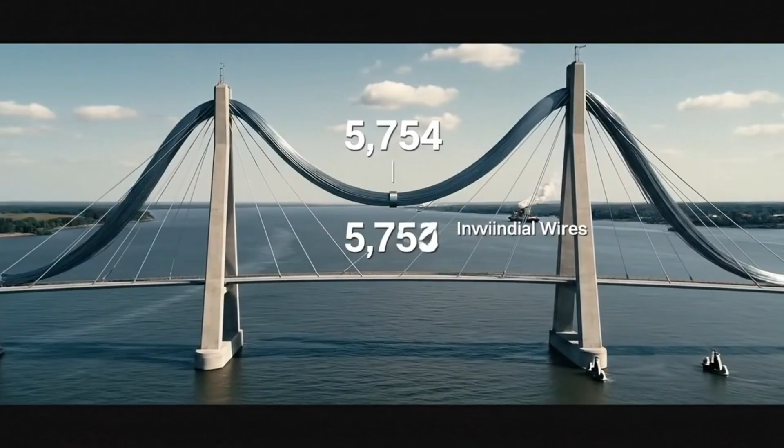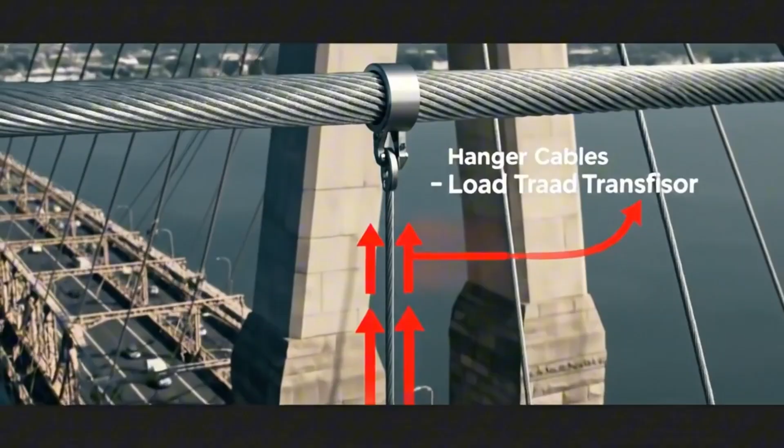In this documentary, we'll witness 5 revolutions across 5,000 years. From the weight of stone to the elegance of steel, from brute labor to computer simulation. Every bridge built over an abyss represents the moment a civilization erased the word impossible from its vocabulary. The vertical hanger cables transfer the massive load of the deck below, distributing the weight along the main cable. Get ready to discover the engineering breakthroughs that finally conquered the impossible.

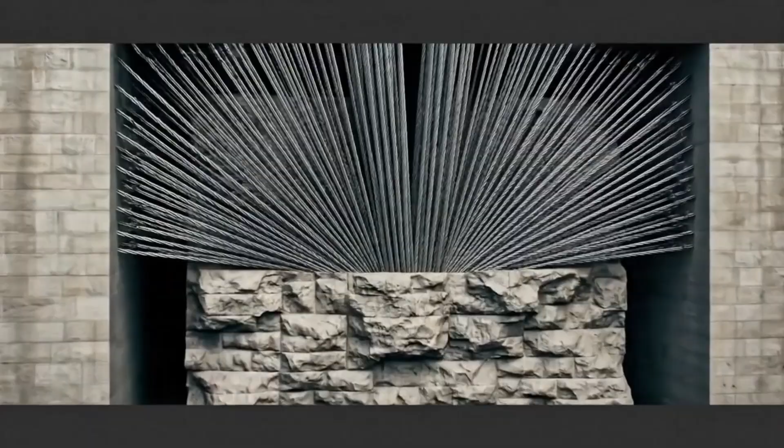What actually stops a 100,000-ton bridge from plunging into the void below? Yet the answer isn't concrete. It isn't steel. It isn't cables. The answer is the invisible laws of physics. We'll unravel the secrets of bridge engineering by decoding the hidden mechanics of arches, beams, and tensioned steel.

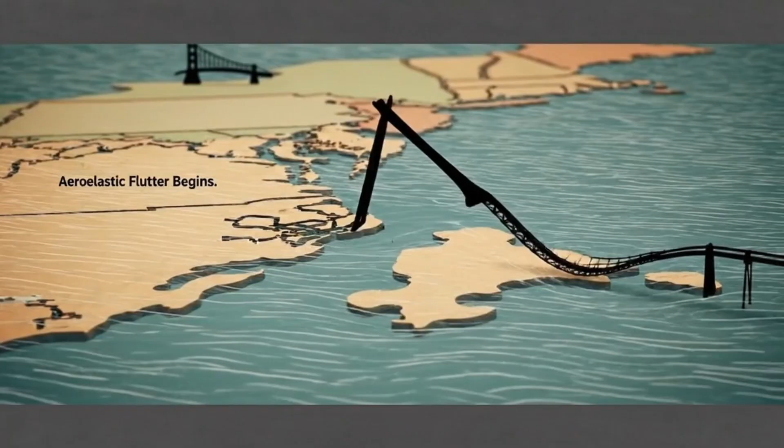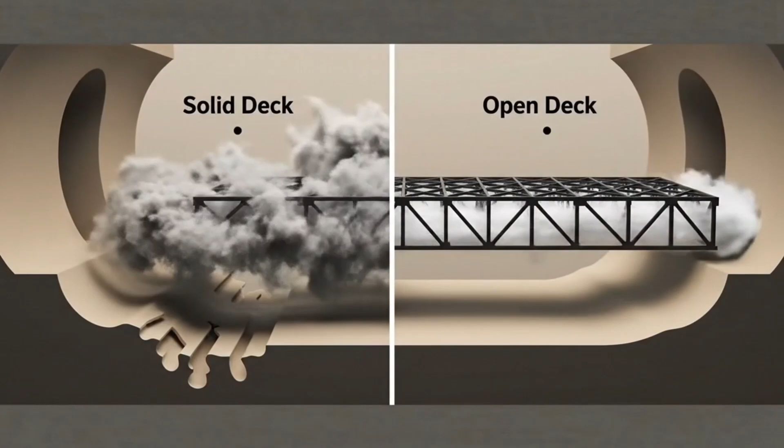Ancient civilizations faced a deadly choice. Find a way across or remain forever divided by the world's great separations. Rivers split empires in two. Valleys shut down trade routes. Straits severed continents from one another. This documentary is the story of how primitive builders, through radical innovation, conquered impossible heights and became master engineers.

A journey that began with a single tree trunk now continues with steel wings soaring 300 meters above the ground. Follow the 5,000-year timeline of the structures that reshaped our planet and wove our world together like a net. Every arch is an equation, every cable is a prophecy, and every bridge is the greatest gift physics ever gave to mankind.

5,000 years ago, the first bridge was a fallen tree trunk. An oak or a plane tree toppled into a river by a storm. An accident. But from that accident, an idea was born. If nature could lay a tree across a river, we could do it deliberately. Humanity had made its first engineering decision.

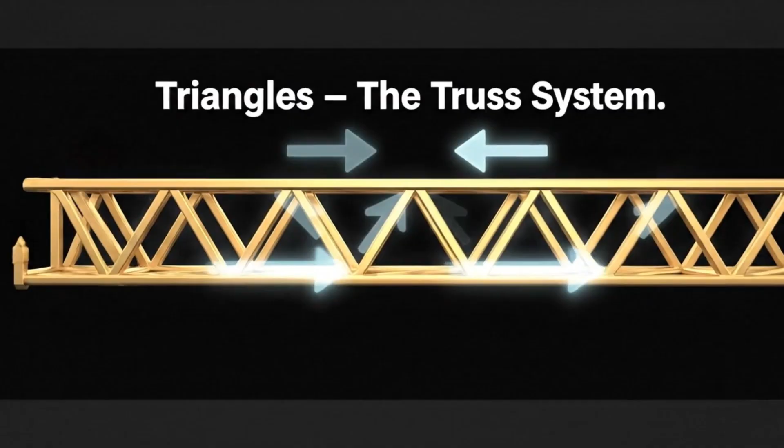The earliest bridges were built from raw materials with raw force. Stone slabs, logs laid side by side, ropes stretched between two rocks. These weren't calculations, they were instinct. The concept of mathematical load distribution hadn't been invented yet. Ancient bridges knew only one strategy for fighting gravity: raw mass.

Thicker stone, more supports, heavier foundations. If the bridge collapses, build a bigger one. This strategy worked, but it had a limit. Stone is heavy and cannot span large gaps. Any stone beam longer than 10 meters collapses under its own weight.

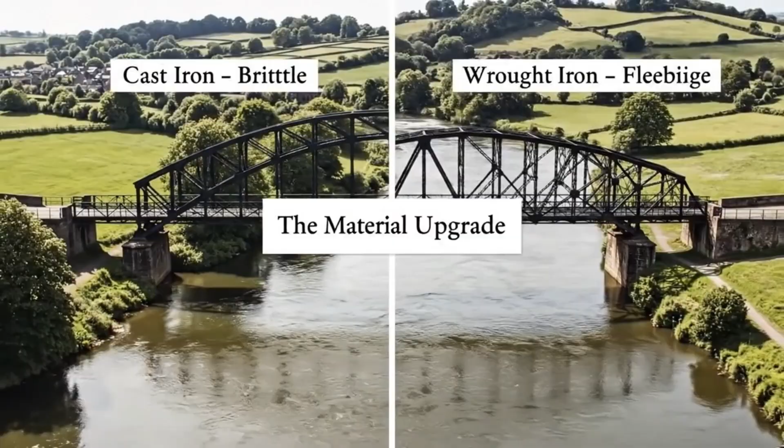The revolution came from Rome. The Romans perfected the arch. The arch is one of the most elegant inventions in the history of engineering. Its principle is profoundly simple, but its effect is revolutionary. It converts a vertical load into lateral compression by pressing the stones against one another.

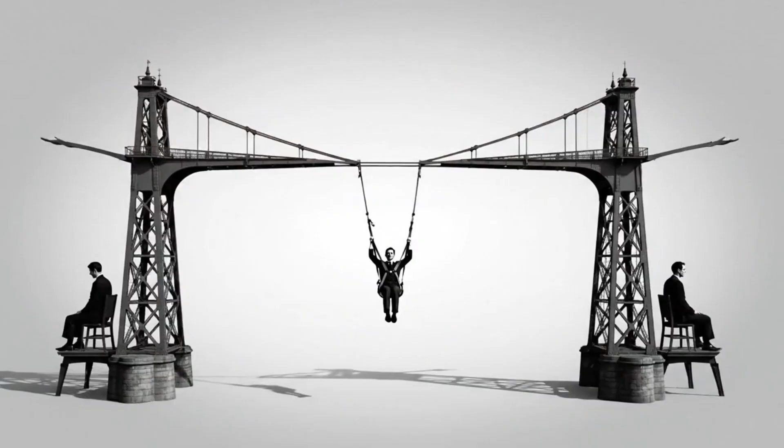Every voussoir leans on the stones beside it. Pull the keystone at the top and the whole structure collapses, but leave it in place and every stone locks the others. The force of compression holds the structure upright. When the Romans applied this principle to river bridges, waterways that had once seemed impassable became crossable.

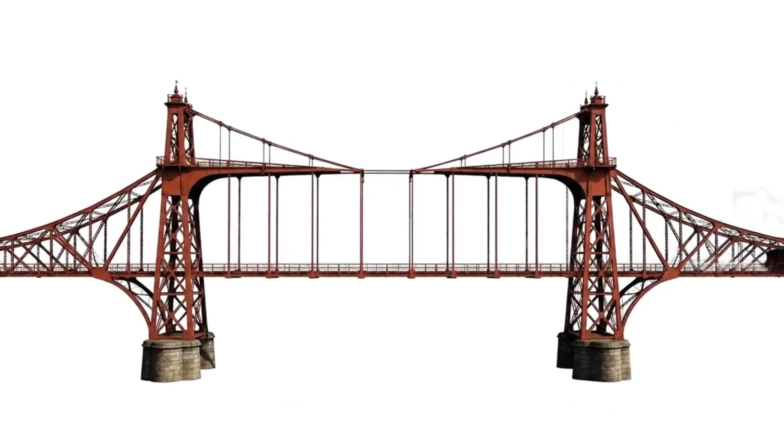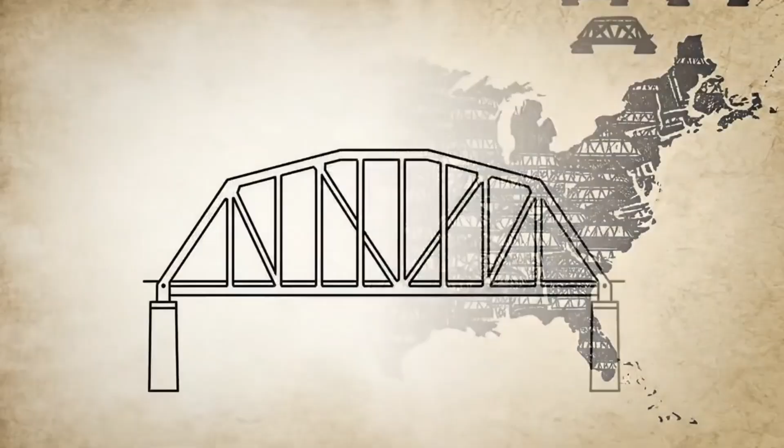The Ponte Fabricio was built in 62 BC and still stands in Rome today. A bridge that has served pedestrian traffic for over 2,000 years. The Romans didn't just build bridges. They laid the circulatory system of an empire. Every river crossing was a trade route. Every trade route was a military corridor. Every corridor was the empire's expansion. Bridges were Rome's instrument of conquest.

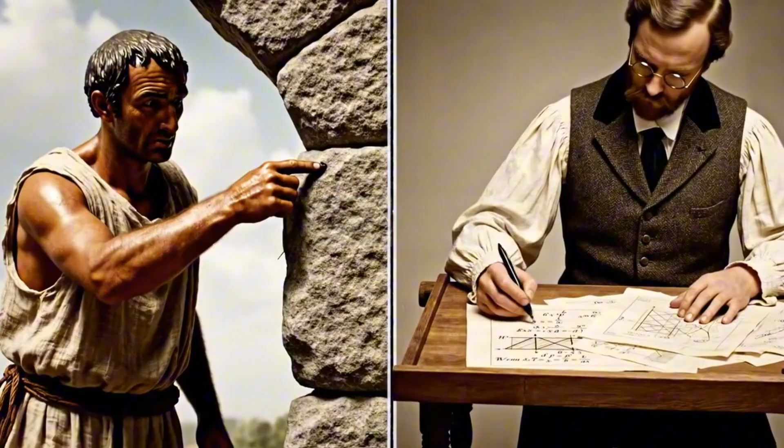The transition from raw natural materials to early stone masonry represents the first great leap in the history of engineering. Temporary crossings became the permanent monuments of an empire. Stone was no longer just weight, it was calculated power. The arch was no longer just a shape. It was the first formula ever written against gravity.

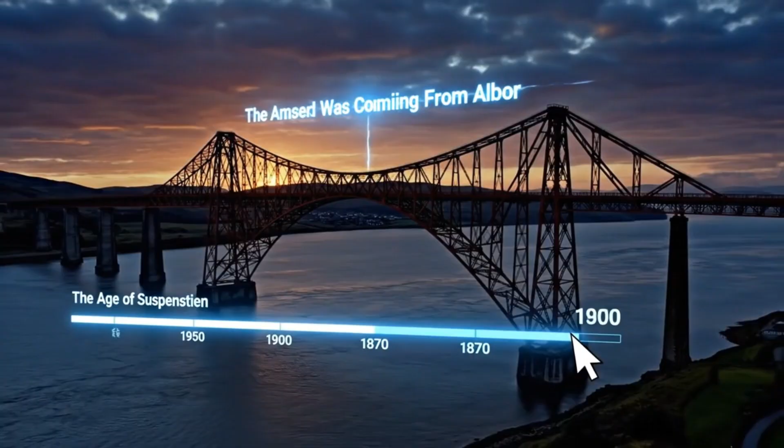The power of the triangle and the railway age, 1700 to 1900. In the late 18th century, the world began to change. The Industrial Revolution created an unprecedented demand for connectivity between factories, mines, and cities. But the real revolution came with the railroad. Locomotives weren't just carrying people and goods.

The loads they carried had long since exceeded the capacity of traditional bridges. A Roman arch could support a legion of soldiers, but it couldn't handle the dynamic load, vibration, and repeated impact of a 100-ton steam locomotive.

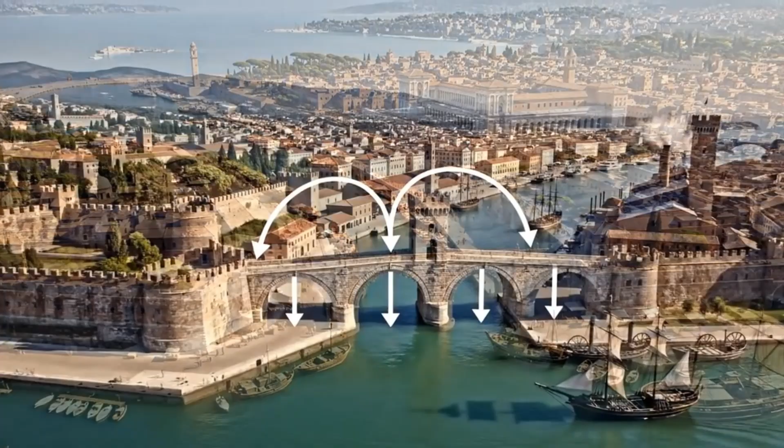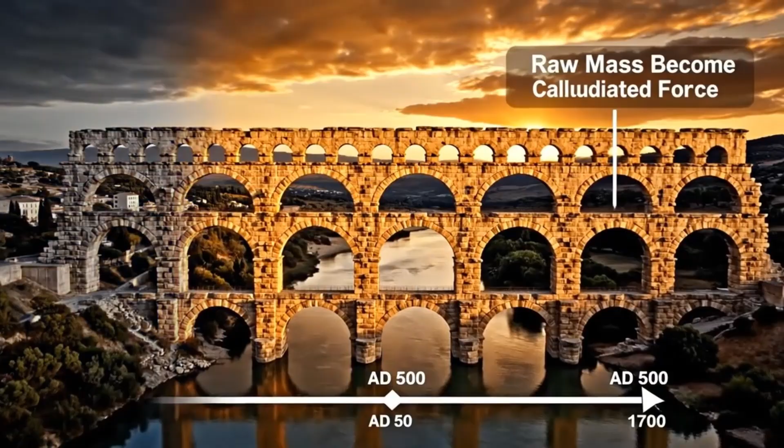Engineering discovered a new structural unit: the triangle. The triangle is geometry's most rigid shape. Push a square and it becomes a parallelogram and collapses. But push a triangle and it holds its shape. This simple geometric truth transformed bridge engineering at its roots. The truss bridge was born.

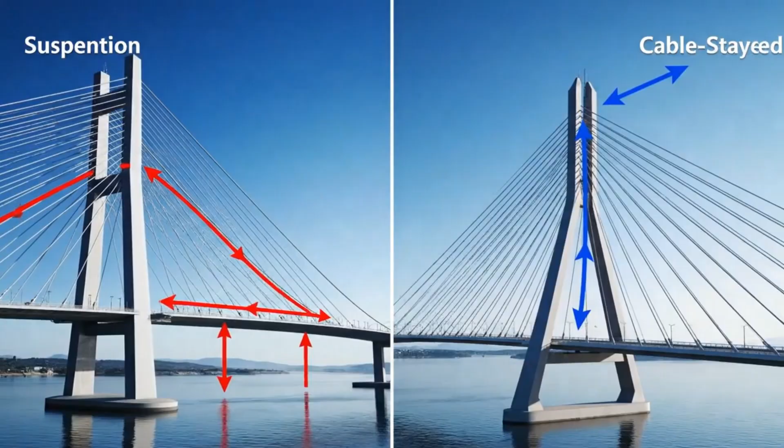In truss systems, metal rods are joined in triangular arrangements. Each triangle distributes forces to neighboring triangles. The result: you can carry far heavier loads with far lighter materials. Cast iron, and later steel, became the material of this triangular revolution. In England, America, and every corner of Europe, railway bridges rose.

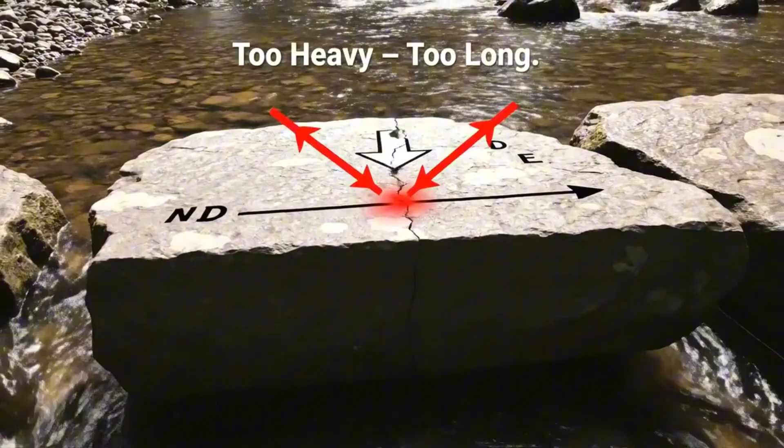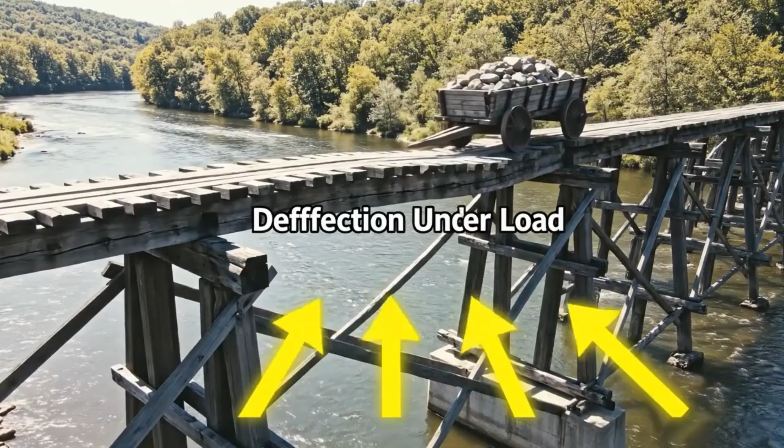The Forth Bridge in Scotland was constructed between 1882 and 1890. Its span, 521 meters. At the time of completion, it was the longest bridge in the world. 54,000 tons of steel were used. The Forth was the triumph of the truss system. But it also symbolized a transformation.

Bridge engineering was no longer an intuitive craft. It was a calculated science. Engineers were no longer saying this looks strong enough. They were calculating material strength, mapping load distribution, and determining safety factors.

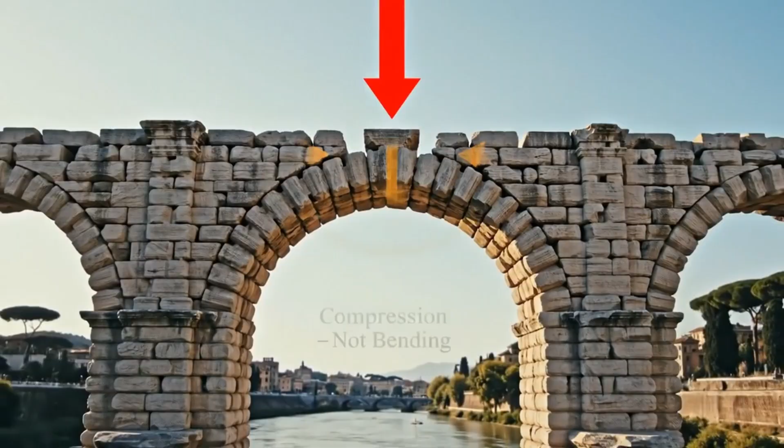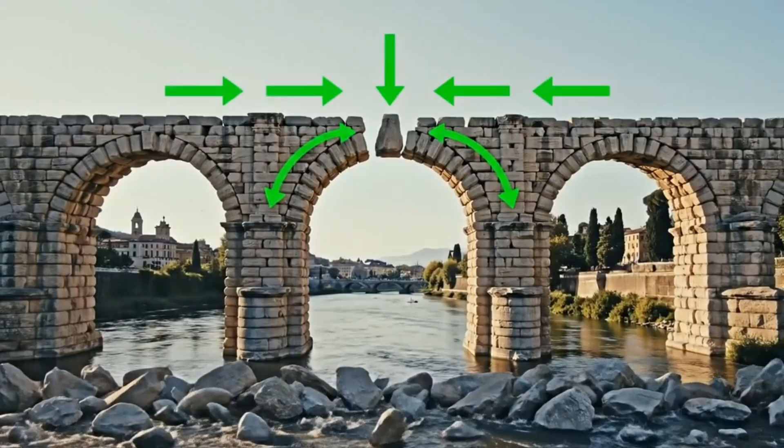This transition was critical. The shift from intuitive approach to precise physical principles laid the groundwork for the age of iron and steel. The triangle gave engineers a language, and with that language they could fight gravity, not with raw mass, but with geometry. Less material, more resilience, longer spans. The triumph of the triangle opened the door to the revolutions of the 20th century.

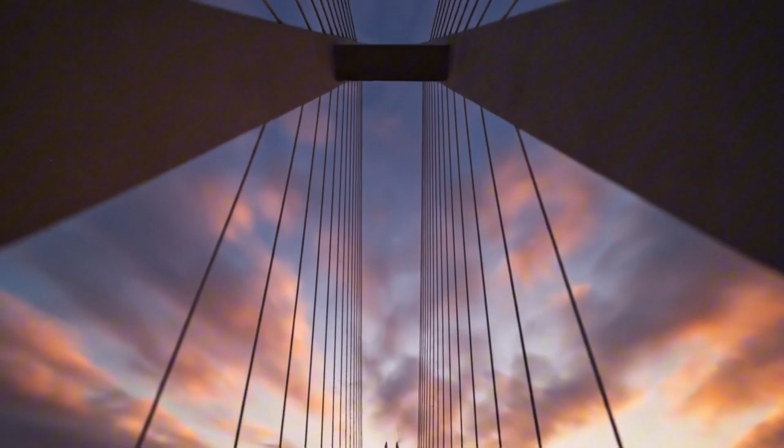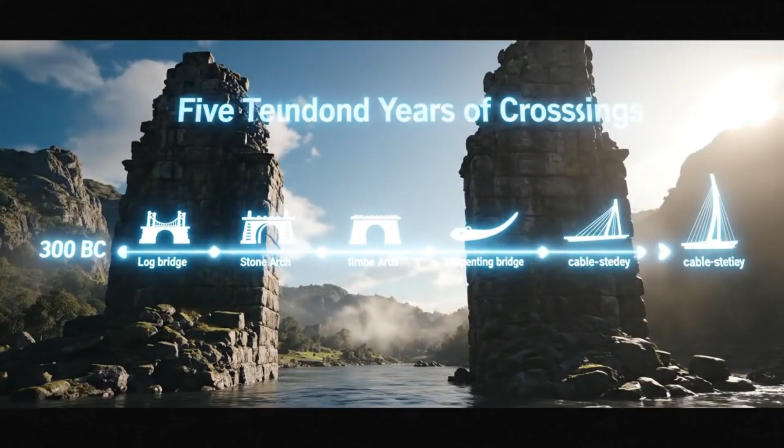Suspension bridges and the steel cable revolution, 1870 to 1950. In the late 19th century, engineers came face to face with a limit. Truss bridges were powerful, but beyond a certain point they became inefficient under their own weight. In spans exceeding 500 meters, the steel truss structure grew so heavy that most of what it was carrying was itself. A different approach was needed.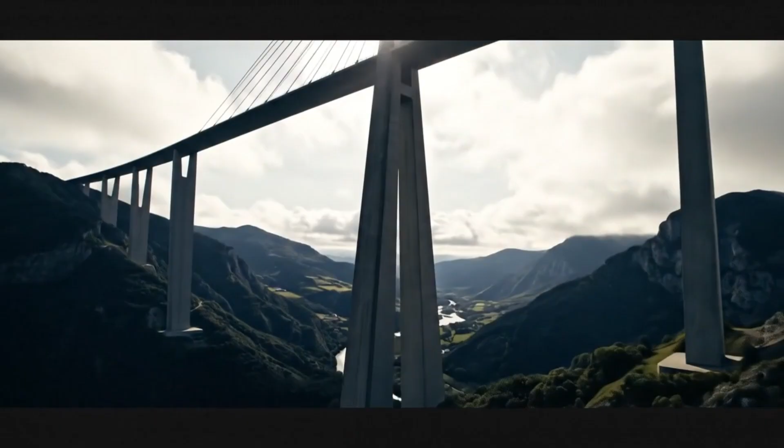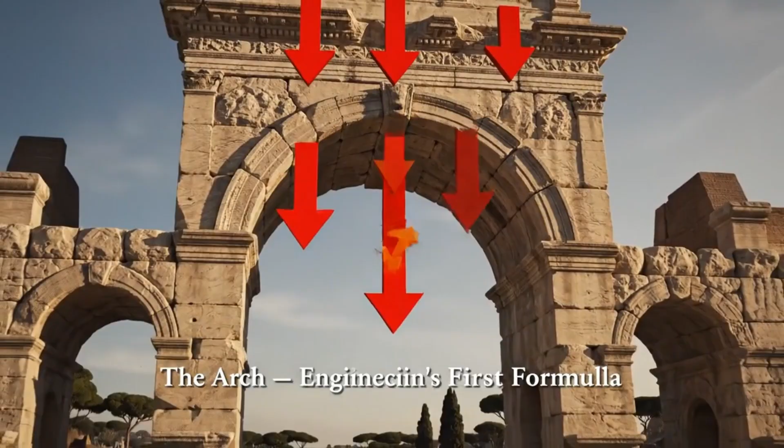The answer came from above: the suspension bridge. The principle was ancient, but the application was revolutionary. Instead of supporting the deck from below, suspend it from above. Main cables anchored to massive towers trace a parabolic curve. Vertical hangers dropping from those cables hold the deck in the air. The deck no longer has to carry its own load. The cables carry it. The cables transfer it to the towers. The towers deliver it to the foundations.

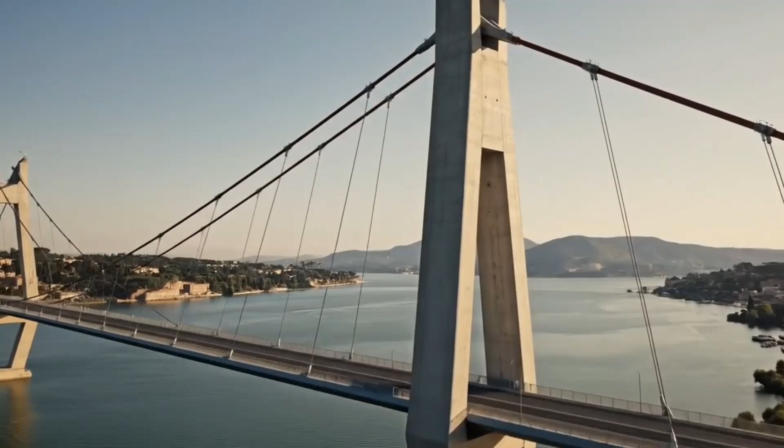The Brooklyn Bridge was the manifesto of this revolution. Completed in 1883. Span: 486 meters. At the time of completion, it was the longest suspension bridge in the world. Its engineer, John Augustus Roebling, perfected steel cable technology. Each main cable was woven from 5,434 individual steel wires. Each wire was pulled, laid, and compressed separately. This process took 14 months.

Brooklyn was not just a bridge. It was proof of suspension bridge physics. When rigid beams gave way to flexible cables, spans could multiply. But every revolution has a cost. In 1940, the Tacoma Narrows Bridge disaster struck. This suspension bridge in Washington State was vulnerable to wind because of its lightened deck.

Winds of 65 kilometers per hour drove the bridge into resonance. The deck began to undulate. The wave amplitude grew. The structure entered aeroelastic flutter and tore itself apart. The disaster was captured on film and became the most famous failure footage in engineering history.

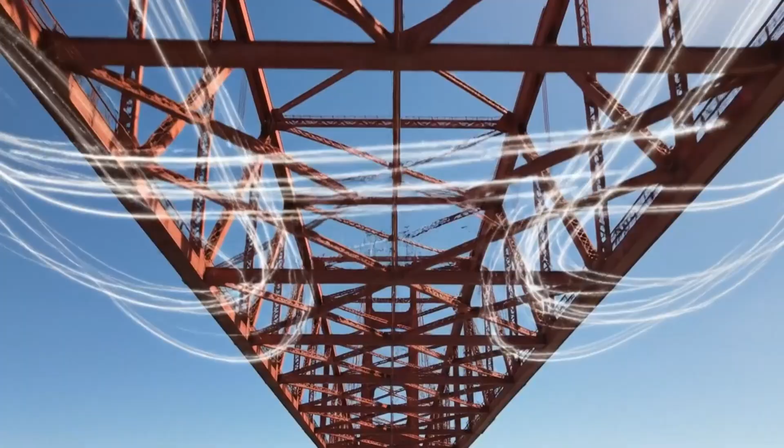Tacoma delivered a lesson. A bridge must resist not only weight, but wind. Aerodynamics became an inseparable part of bridge design. Wind tunnel testing became standard. Deck cross-sections were reshaped into aerodynamic profiles. The legacy of catastrophe was safety.

When the Golden Gate Bridge was completed in 1937, its span of 1,280 meters made it the longest suspension bridge in the world. Its Art Deco towers, international orange color, and silhouette rising through the San Francisco fog made it not just an engineering achievement but a cultural icon. The Golden Gate proved both the power and the beauty of the suspension bridge.

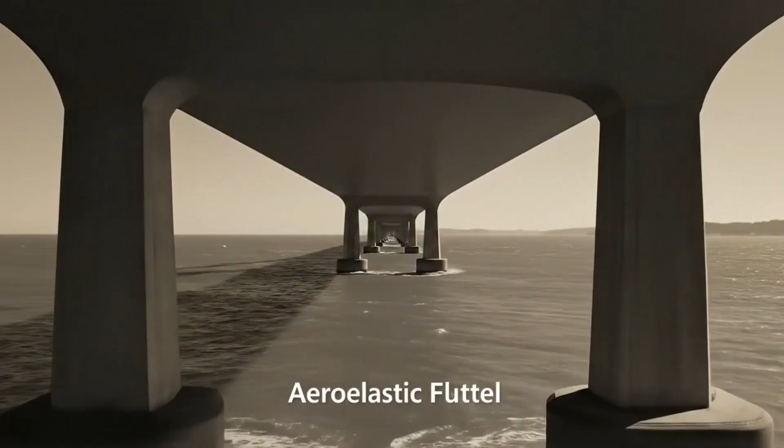Gravity had ceased to be an enemy. It had become a partner. Weight was entrusted to cables, and the cables carried it with grace. Engineering and aesthetics had achieved their most perfect harmony.

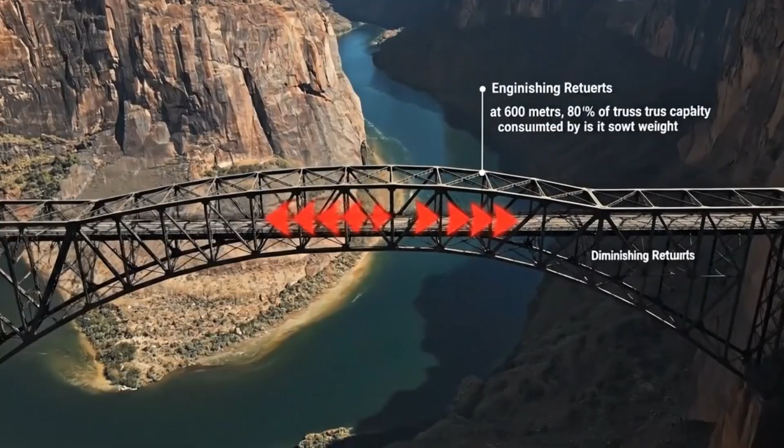From Millau to mega bridges, 1950 to 2020. In the second half of the 20th century, bridge engineering shifted to a new paradigm: cable-stayed bridges. In suspension bridges, cables trace a parabolic curve and carry the deck via vertical hangers.

In cable-stayed bridges, cables run directly from the tower to the deck. Straight lines, geometric clarity. Each cable is a force vector, and the engineer can calculate every vector individually. This design brought one major advantage: modular construction.

The deck can be built section by section. As each section is set in place, cables are attached and it begins carrying load. No scaffolding required. You don't need to close off the river or valley below. In midair, piece by piece, the bridge builds itself.

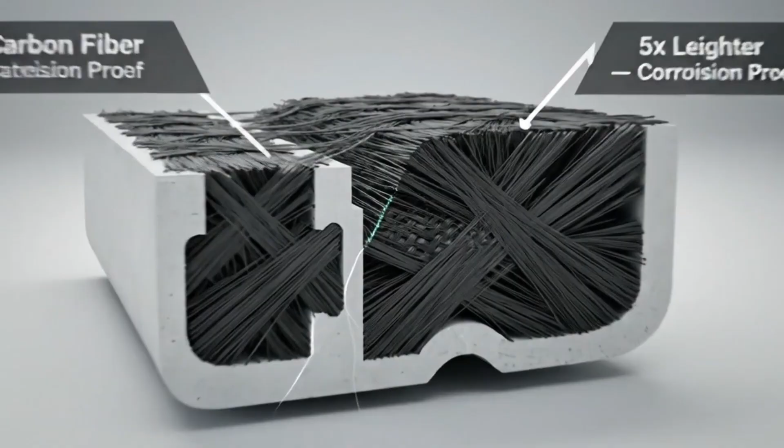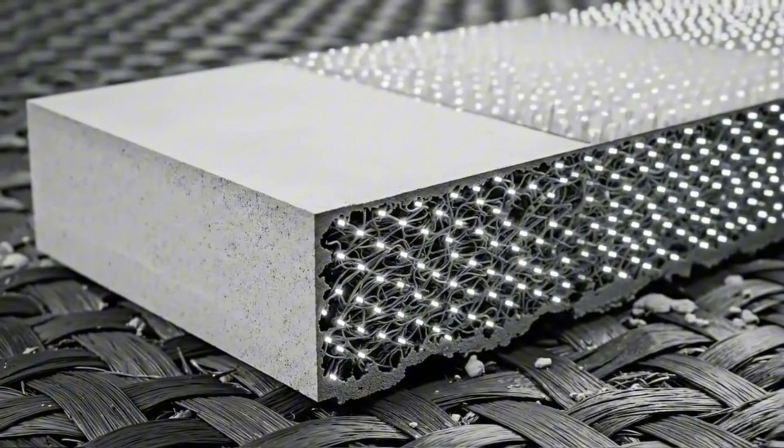The Millau Viaduct is the masterpiece of this technology. It soars over the Tarn Valley in southern France. Its highest point, 343 meters, taller than the Eiffel Tower. Total length, 2,460 meters. 7 massive pylons carry the deck, and from each pylon, fan-shaped cable stays reach down to the roadway. Upon completion, it was the tallest bridge in the world.

Architect Norman Foster and engineer Michel Virlogeux collaborated on the design. The result was not only functional, it was breathtaking. Millau proved that a bridge could be a work of art.

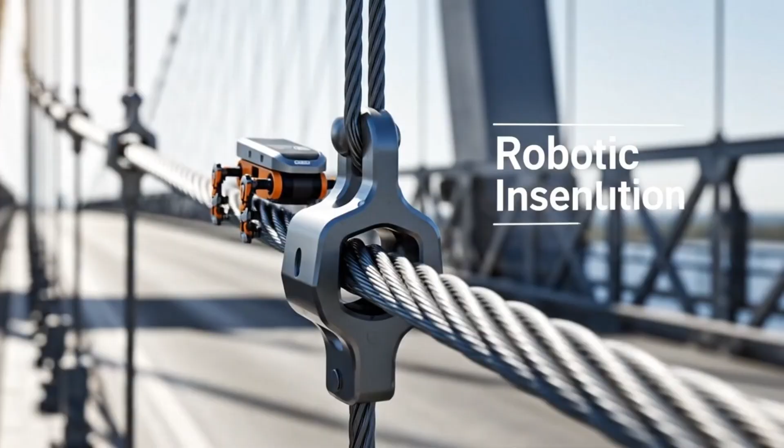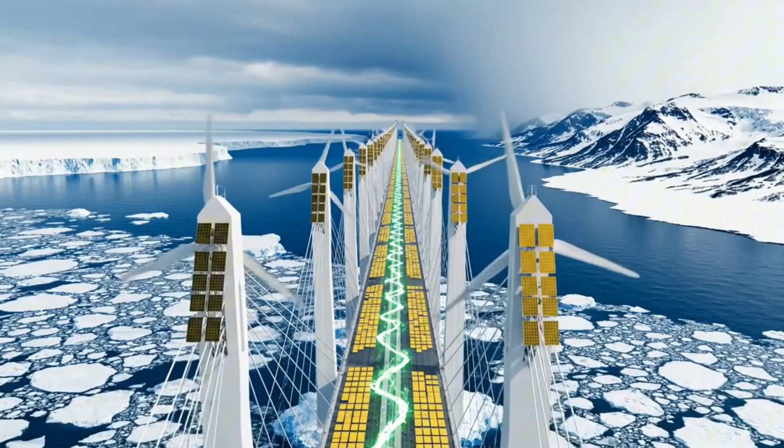Another defining force of this era was the computer. Finite element analysis software allowed engineers to calculate thousands of stress points in real time. Slender deck profiles, elegant tower geometries, and spans previously considered impossible could now be simulated and built. The computer gave engineers a third eye. They could now see the forces, stresses, vibrations, and wind effects at every point in the structure, before construction even began.

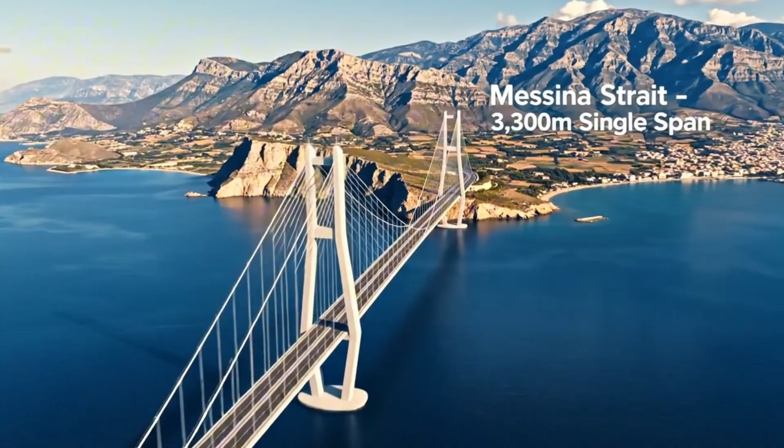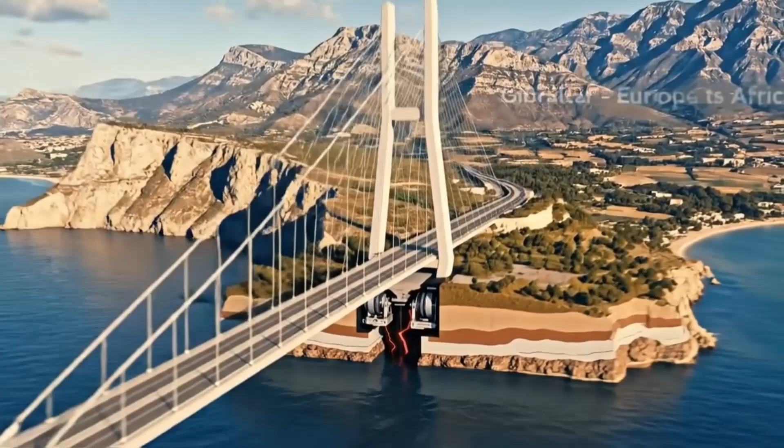The Hong Kong-Zhuhai-Macau Bridge represents the global trade dimension of this era. 55 kilometers long, a mega infrastructure of sea-crossing bridges, artificial islands, and underwater tunnels. It connects 3 cities. Construction took 9 years. These bridges no longer just connect 2 shores. They connect economies. They bring continents closer. They form the physical backbone of global trade.

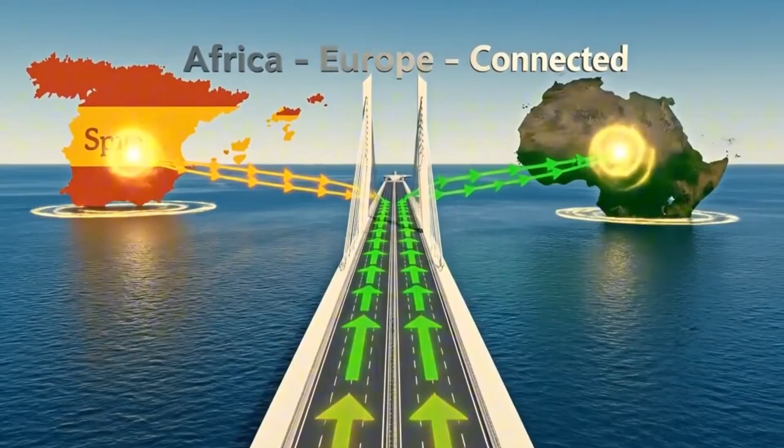In the 21st century, the bridge became a phenomenon beyond engineering, a symbol of a nation's technological capacity, economic power, and international connectivity. Cable-stayed systems wrote the structural language of that symbol. Smart bridges and mega projects, 2020 to future.

As the third decade of the 21st century opens, bridge engineering has reached a new threshold. The question is no longer, how long a span can we cross? The question has become, how smart can we make the bridge? The new generation of mega bridges completed around 2026 can diagnose themselves. Carbon fiber reinforced polymer is 5 times lighter than traditional steel and completely corrosion resistant.

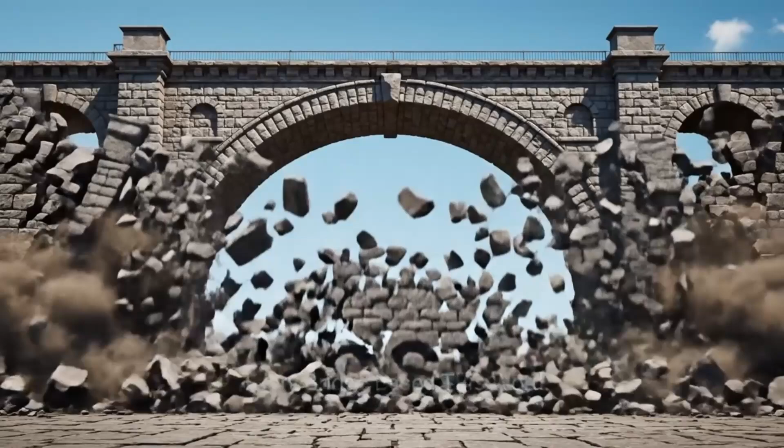But the real revolution isn't in the material. It's in the nervous system inside the material. Fiber optic sensors are embedded directly into the concrete and steel structure. Temperature, stress, vibration, and deflection are measured at every centimeter. Data streams to the cloud.

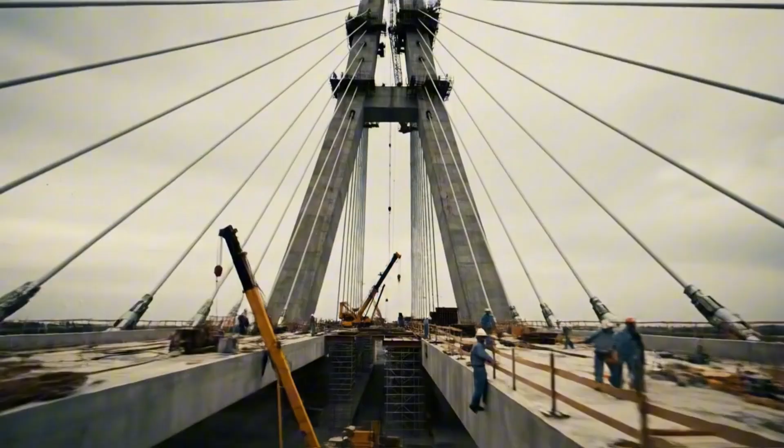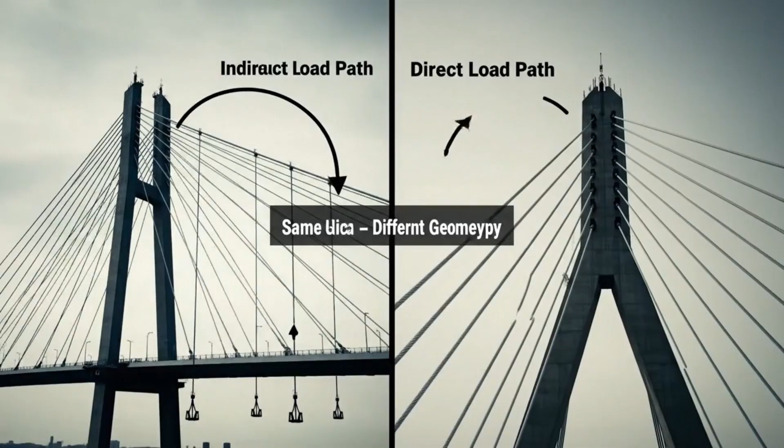Machine learning algorithms predict structural fatigue weeks before a crack forms, while maintenance alerts are automatic. Repair plans are prepared in advance. The bridge is no longer a passive structure. It is a living organism monitoring its own health.

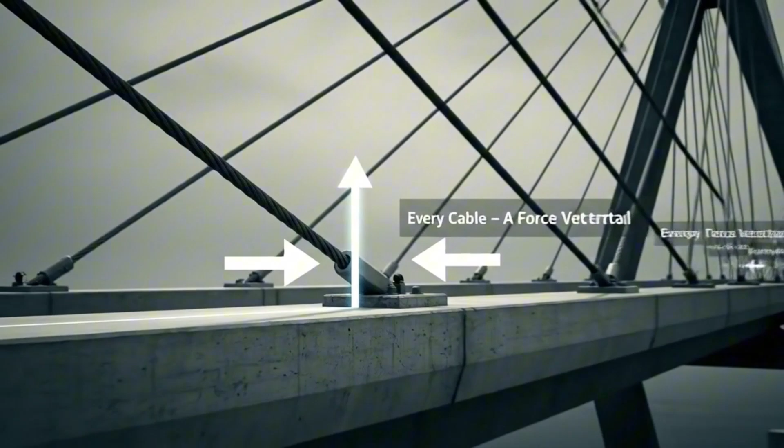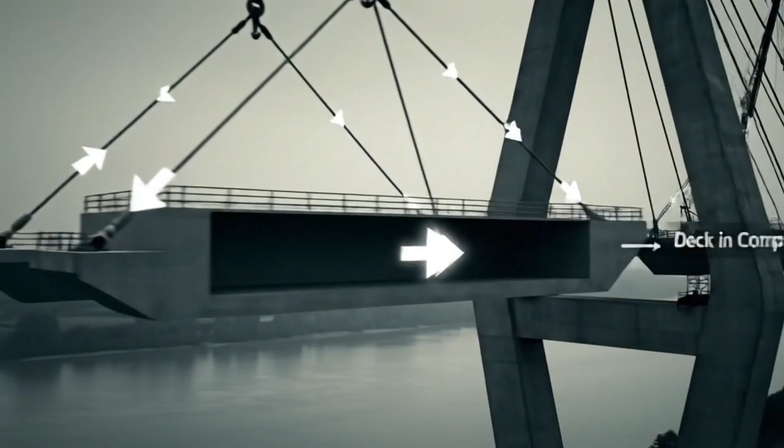The most ambitious projects of the future aim to connect continents. The Bering Strait Bridge concept, 85 kilometers between Alaska and Siberia. If built, it establishes a road connection between North America and Asia. The Strait of Gibraltar Bridge, 14 kilometers between Spain and Morocco. It unites Europe and Africa.

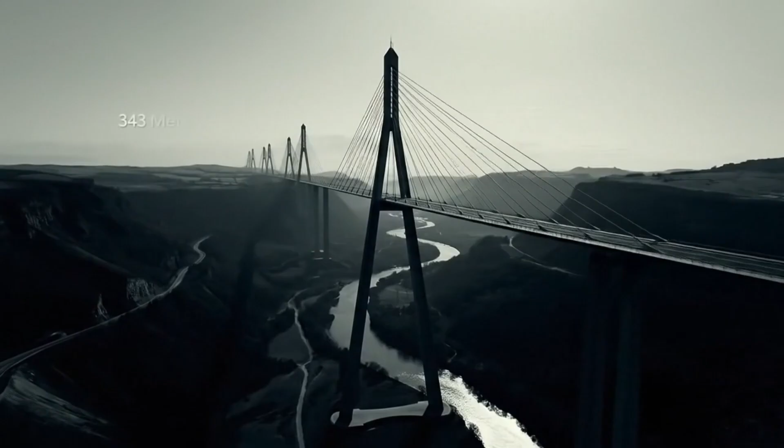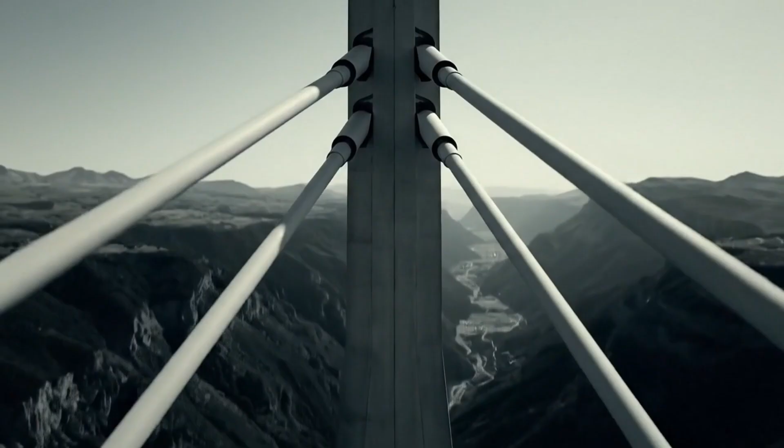The Strait of Messina Bridge, a 3,300-meter span between the Italian mainland and Sicily. When completed, it will be the world's longest single-span suspension bridge. These great divide projects represent humanity's confrontation with its last geographic barriers. Each one is technically feasible. Each one is waiting for political and economic will.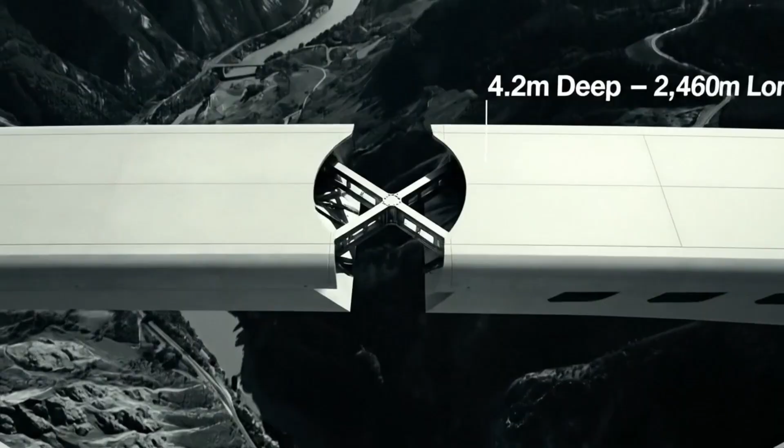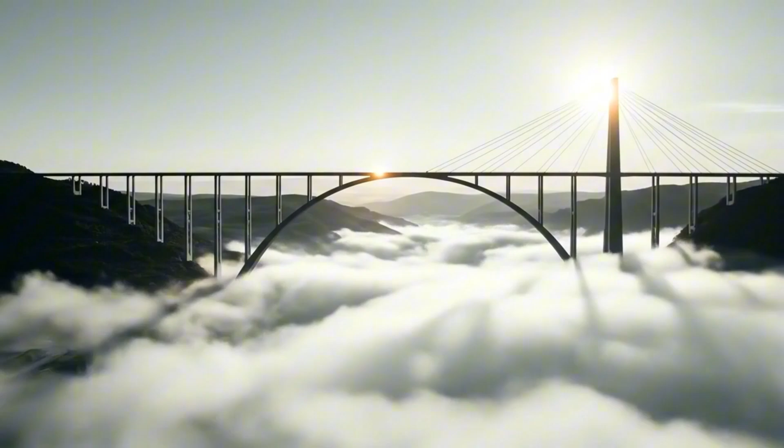But perhaps the most exciting innovation is also the quietest: energy harvesting bridges. New designs integrate wind turbines into bridge towers. Solar panels are installed on the deck surface. Piezoelectric materials generate electricity from traffic vibrations. The bridge no longer just consumes energy, it produces it. It powers its own lighting, sensor network, and traffic management system with electricity it generates itself.

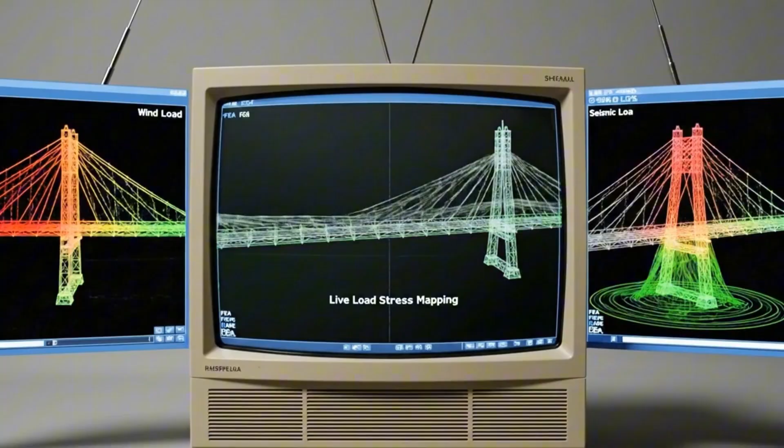Carbon footprint approaches zero. 5,000 years ago, when we pushed a tree trunk across a river, we only wanted to get to the other side. Today, bridges connect continents, generate energy, and monitor their own health. But at the core of every bridge, the same idea remains: to connect the two sides of a void.

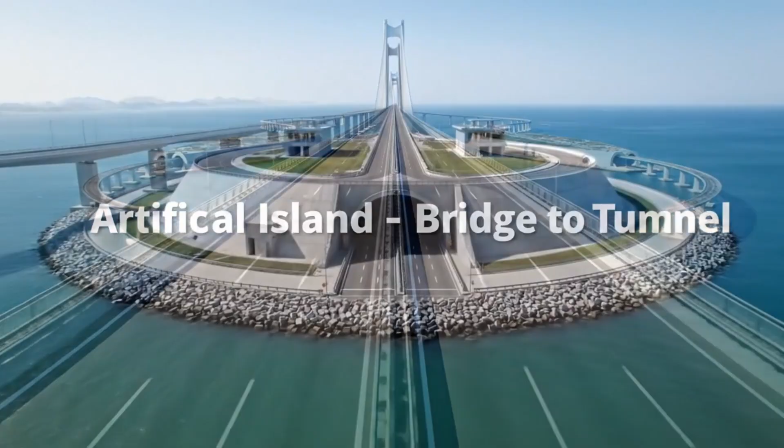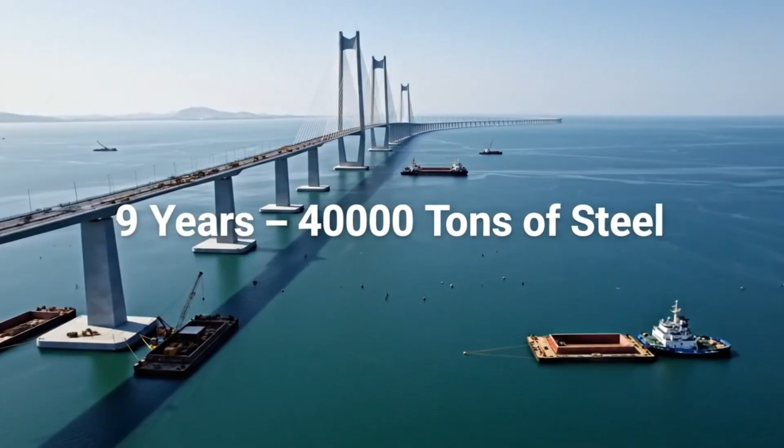For 5,000 years, every engineer, every worker, every stone faced the same question. How do we cross? The answer changed every time. Stone, iron, steel, cable, carbon, digital. But the question never changed, and it never will. Because as long as humanity exists, there will always be one more void to cross.